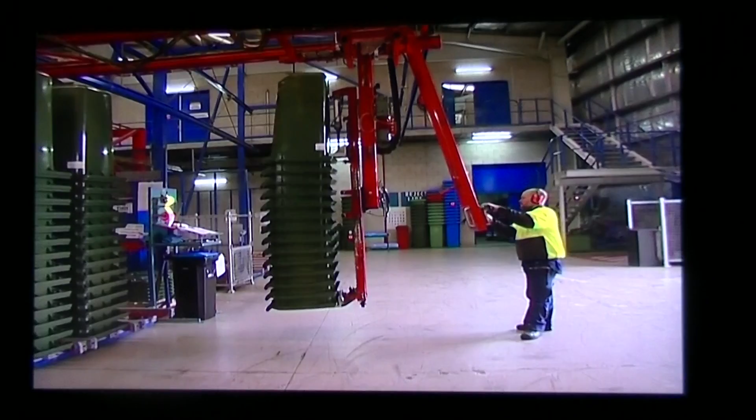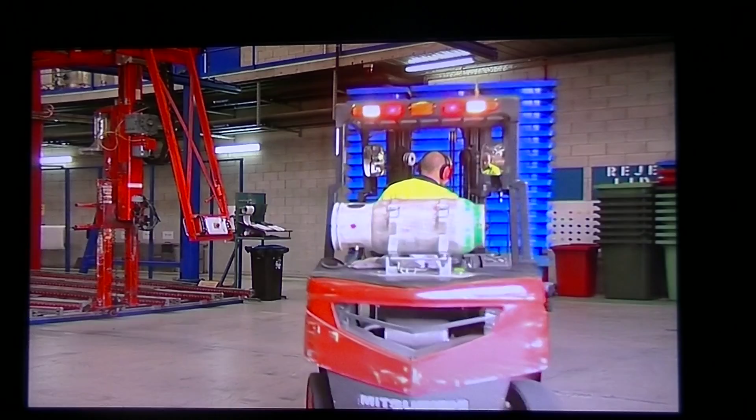We ensure that our MGBs are safe, user-friendly and built to last, which is why our bins come with a stamp of approval in the form of either a DIN EN 840 certificate or a RAL quality mark. Waste containers that carry the RAL quality mark are guaranteed to provide maximum usability, working safety, environmental protection and compliance

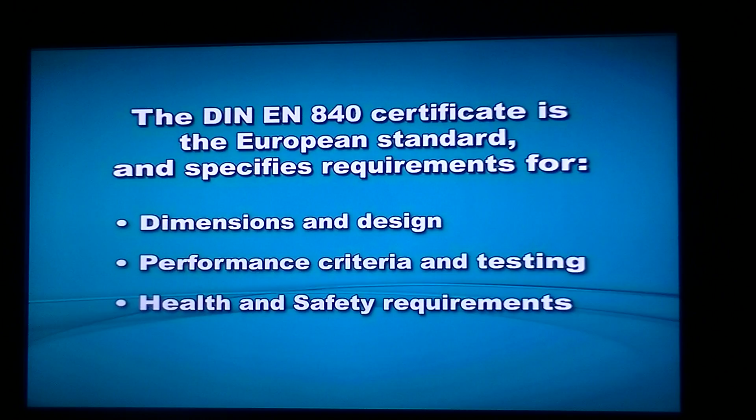with applicable standards. That includes the DIN EN 840 certificate, which is the European standard for the manufacture of mobile waste containers, and specifies requirements for the dimensions and design, the performance criteria and testing, and the health and safety requirements of the MGB.

In order to obtain this certification, Sulo was required to send MGBs made in the Australian manufacturing plant to an authorised testing facility in Europe, where the bins are put through a series of tests, and where the survival rate of these tests is exceptionally low. Sulo emerged as the only Australian manufacturer of MGBs certified to carry the DIN EN 840 certificate.

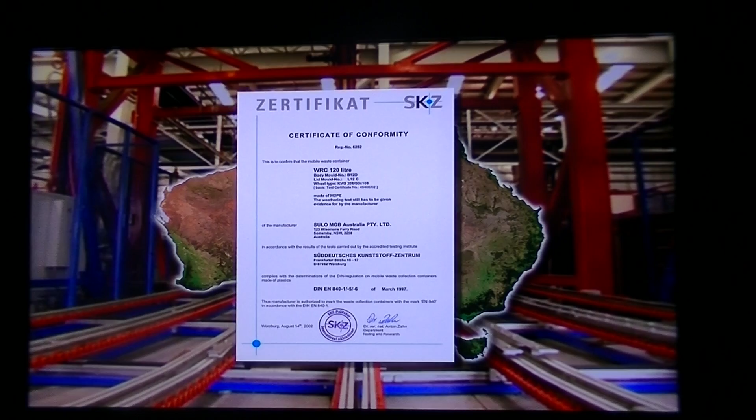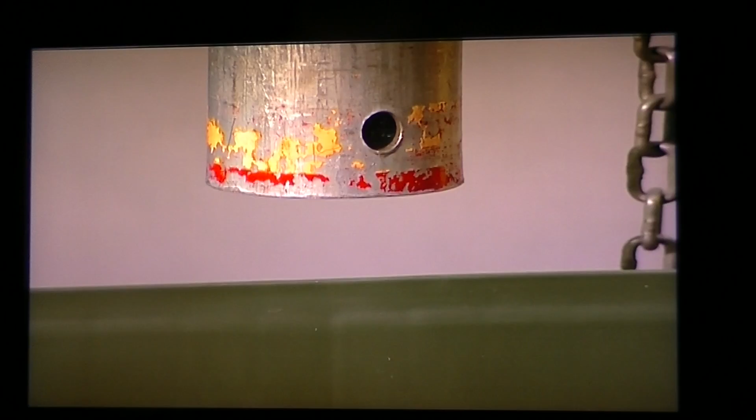Having set a quality benchmark in Australian waste management, Sulo have gone one better by approaching Standards Australia to establish a national standard for the manufacture and use of MGBs in Australia. The standard is being developed by a committee of relevant stakeholders who provide the waste industry with consistent guidelines for

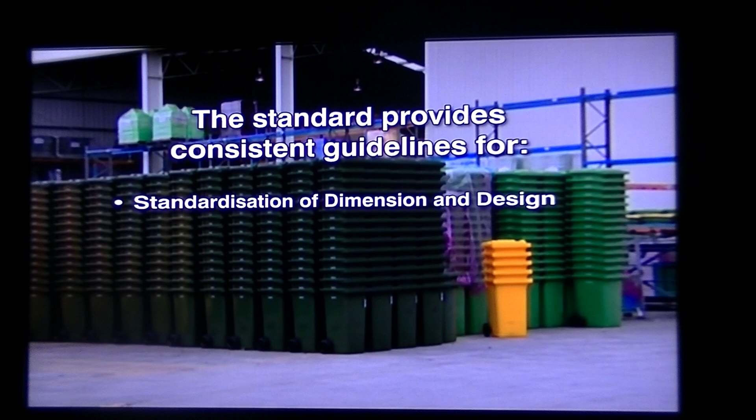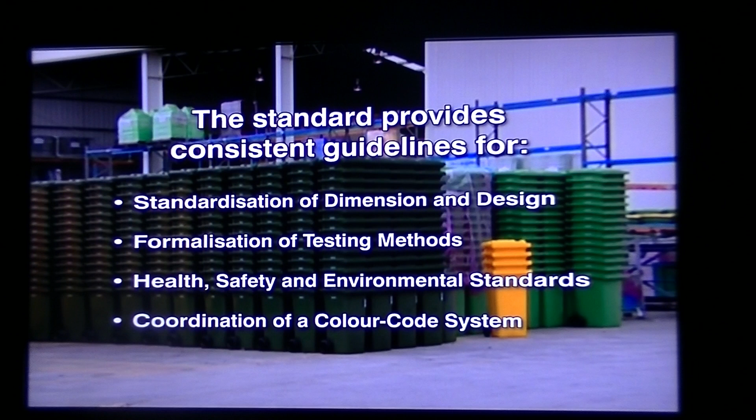standardisation of dimension and design of all MGBs up to 1,700 litres, formalisation of testing methods for waste containers sold in Australia, health, safety and environmental standards for waste bins, and coordination of colour code systems to distinguish the use of particular waste containers. So let's have a look at what makes Sulo MGBs superior.

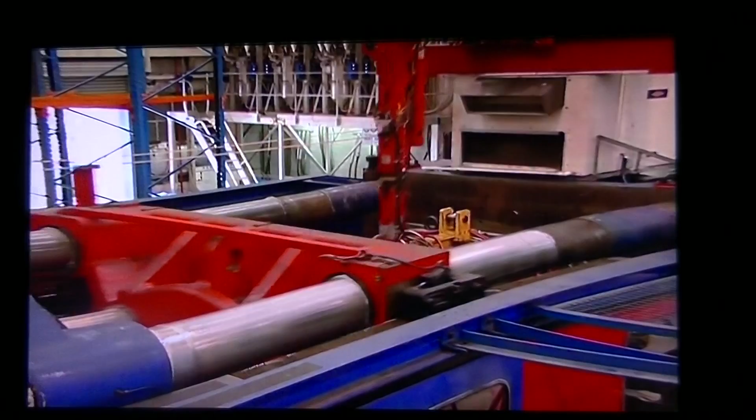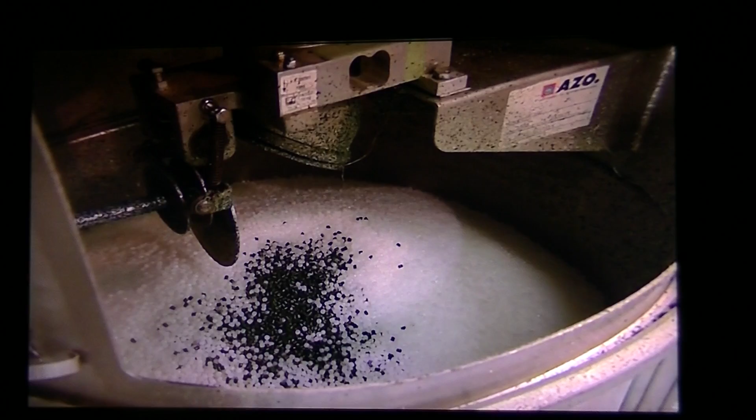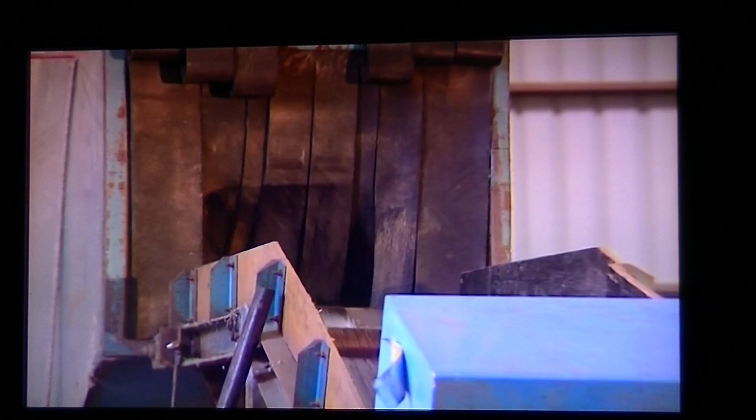Sulo is one of the many companies known as polymer processors. Polymer processors are manufacturers that take raw materials called high-density polyethylene, or HDPE, and convert them into a range of waste containers for the consumer. Sulo processes both virgin raw materials and recycled plastic materials, including milk bottles and old MGBs that have been collected from the community. But how do we get from the raw HDPE to a complete MGB?

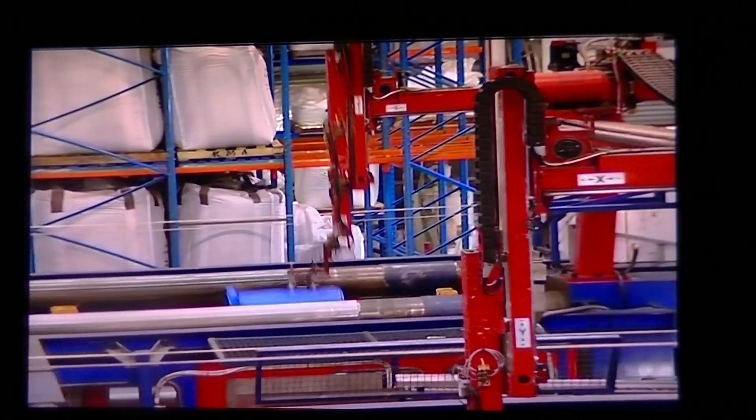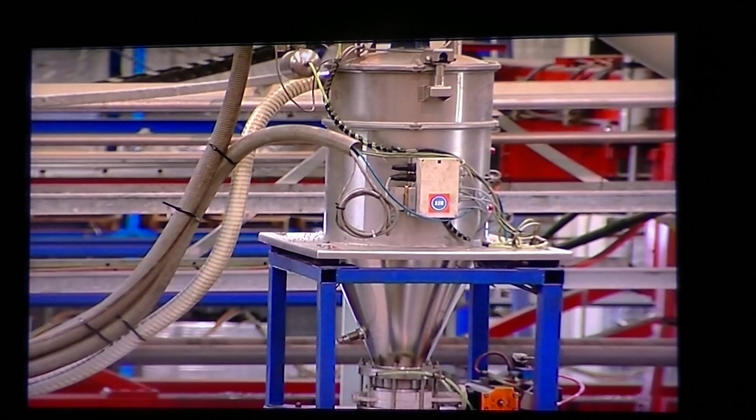The machinery used to convert the raw material into a completed MGB is called an injection moulding machine, a complex device using hydraulic operating systems to drive the various parts. It consists of two main operating systems, the mould clamping system and the plastic HDPE injection system. The clamping system uses hydraulic cylinders that supply enough force to keep the mould closed together, so when the plastic is injected, it is contained within the mould.

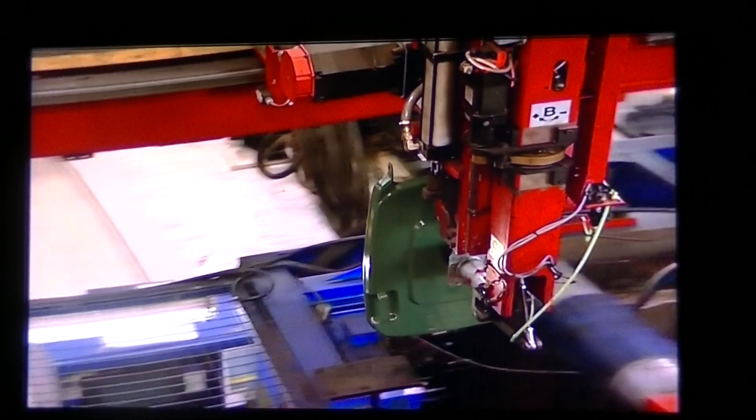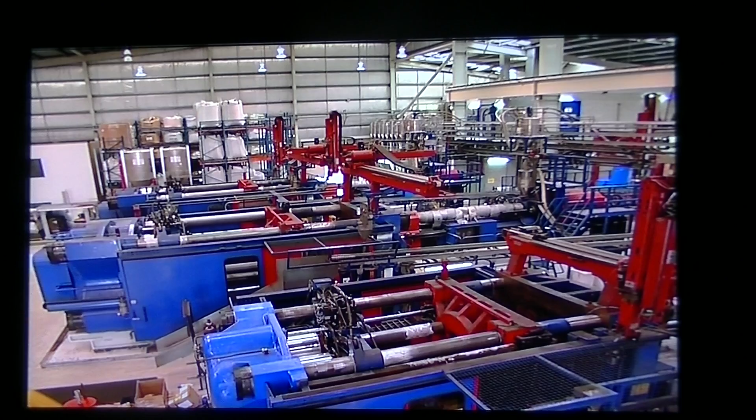The injection system is vital to producing a consistent MGB of correct specifications. It consists of a large steel cylinder that is surrounded by electrical heaters. Inside the cylinder is a device similar to a large screw. The raw material is placed in the barrel and heated to approximately 270 degrees Celsius to melt. Once melted, the plastic is transferred along the barrel by the screw.

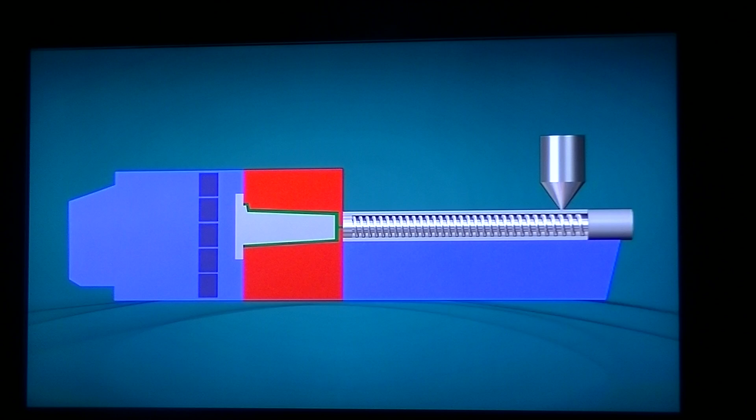The plastic is then injected into the mould using hydraulic pressures. This process is carefully controlled to ensure the mould is completely filled with plastic. The plastic is then allowed to cool, assisted by the flow of cold water around the mould, and is then removed. Now we have a near completed MGB.

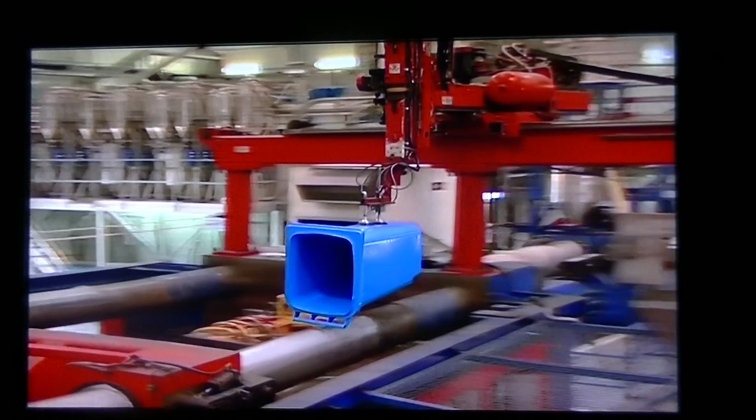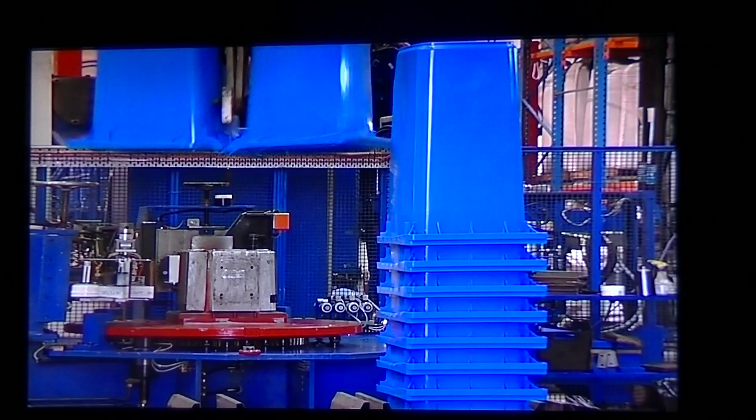During the manufacturing process, we also have the ability to customise each individual order. Not only can we allocate a unique serial number to each bin, but we can also supply our customer's name and logo through a process called hot stamping.

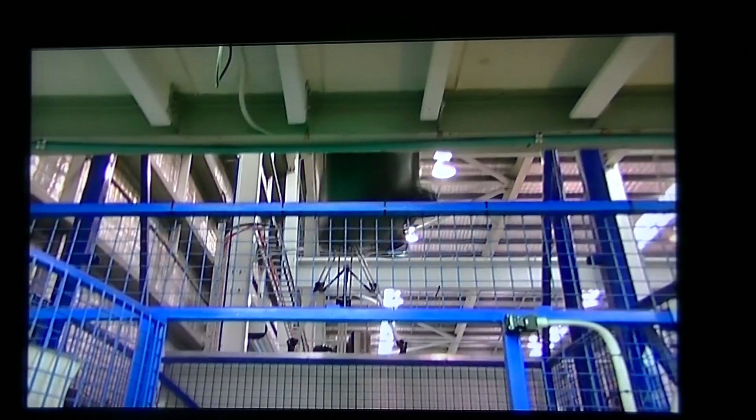We also endeavour to keep up with new technology developments as they occur. For instance, the insertion of radio frequency identification tags, enabling our customers to identify each bin and its exact location. Let's have a look at some of the paces our bins are put through to make the grade.

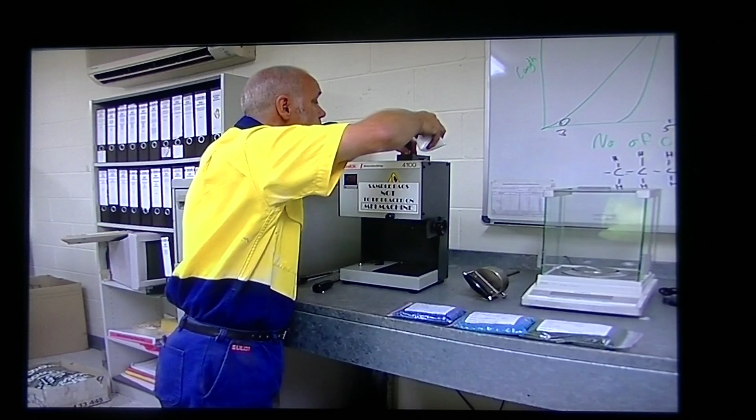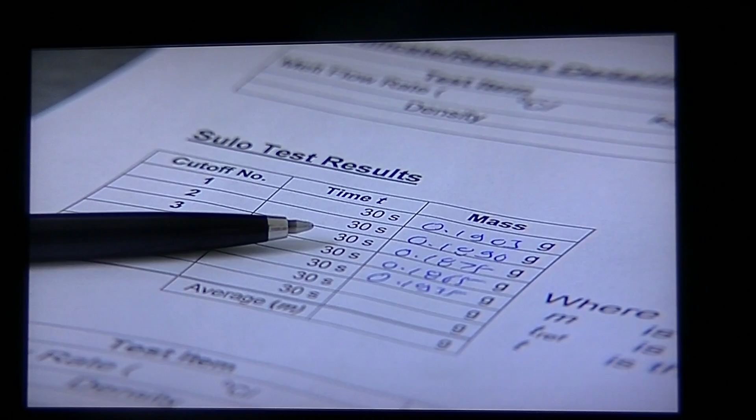To begin with, each new batch of virgin raw material that is delivered to Sulo is visually inspected and then put through an extrusion test to ensure the material supplied exactly matches the required specifications. The test data and sample material are then filed in the Sulo Quality Assurance Log to ensure long-term consistency and traceability of all our products.

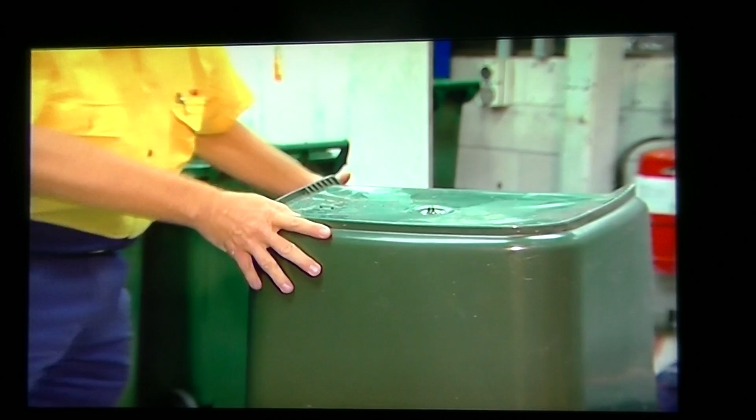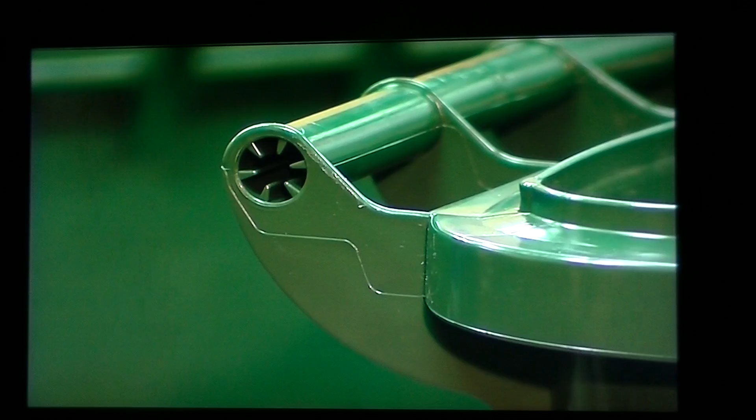Both before and after the sequence of performance tests, a visual inspection is carried out on all MGBs. This is to ensure the MGB has no damage or visual defect, such as cracks, bubbles, large flashes, sharp edges, or any surface defects. This phase of testing also ensures the manufacturing characteristics of the MGB, such as wall thickness, axle diameter, handle diameter, weight and volume, are equal to or better than those specified in the standard.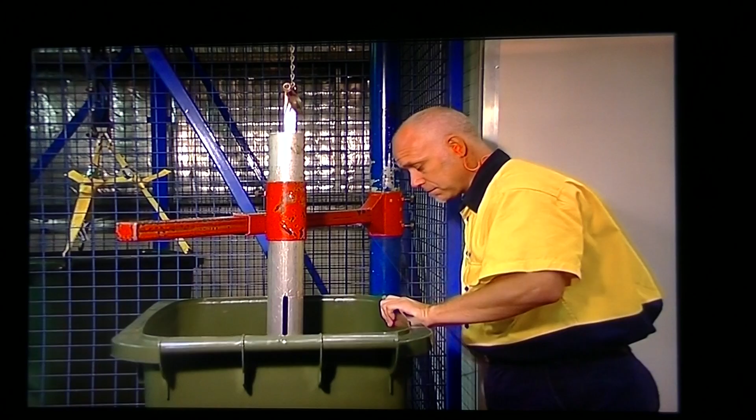In this test, an MGB is placed on a steel plate, with the distance between the base of the MGB and the ground being 50 millimeters, ensuring the base can spring freely. A 5 kilogram cylinder is then dropped from heights of 0.8 of a metre on the body, rim and lid, and 1 metre on the base, impacting with sensitive points of the MGB such as the injection point, the handles, and the junction between the body and the lid.

This test is also conducted with an MGB that has been cooled to minus 20 degrees Celsius for a minimum of 12 hours to simulate the very harsh working conditions. The purpose of this test is to assess the ability of the sensitive points on the MGB to resist impact and therefore perform above and beyond the requirements of the standard and the expectations of our customers.

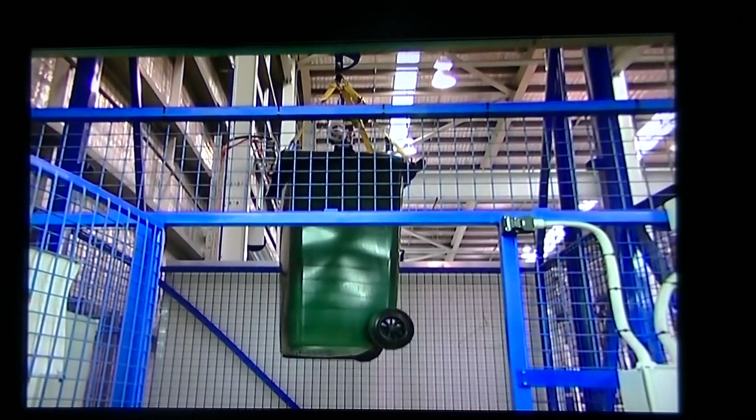The drop test is carried out to ensure the integrity of the container after being dropped from a height beyond anything that normally happens in the field. In this test, 2 samples are filled with a load equal to 40% of their total capacity. For example, a 240-litre MGB is filled with 96 kilograms. Each sample is then dropped 4 times from a height of 3 metres. For the first 3 tests, the containers must land level.

On the 4th attempt, the container must hit the bottom front edge. This angle is achieved by lifting the container by the back rim only. After each drop, a visual inspection is carried out to check for any damage to the container. In order to pass this test, and unlike inferior products, the Sulo MGB must maintain its functionality and not split or crack at any time during the process of the 4 drops. This test is also conducted with an MGB that has been cooled to minus 20 degrees Celsius for a minimum of 12 hours to simulate the more extreme conditions.

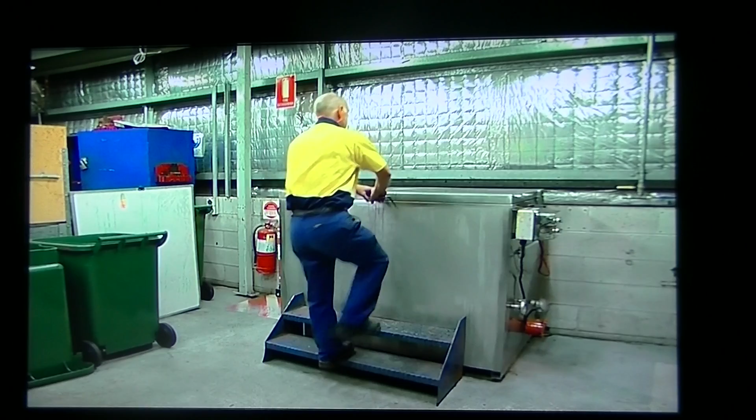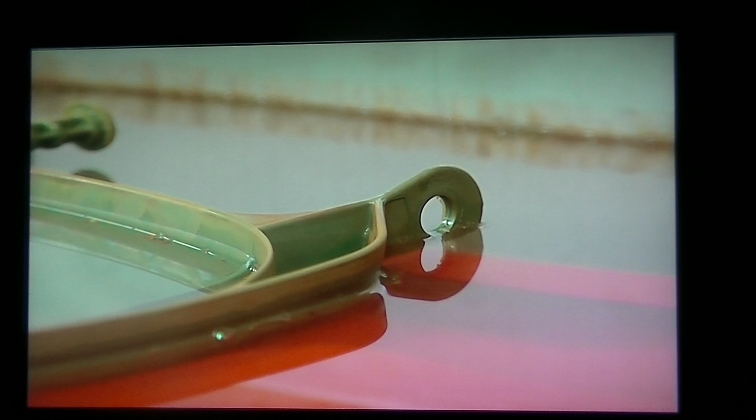To ensure the longevity of our products, we also conduct a stress test, whereby a tank large enough to contain a complete MGB is filled with a solution of detergent and water and heated to a temperature of 70 degrees Celsius. Once heated, the Sulo MGB is then placed in the tank for a period of 48 hours, simulating years of aging. After removal from the bath and rinsing, the appearance is then evaluated with normal vision from 1 metre in bright daylight.

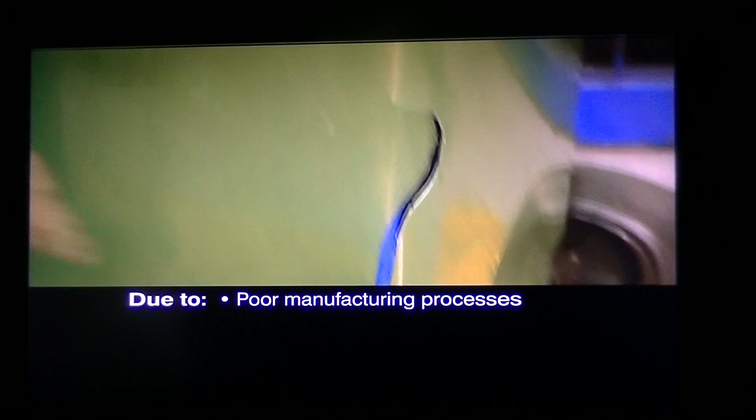This test is carried out to determine the level of internal stress moulded into the plastic, which may not become apparent for several years, but could potentially cause future failures. Unlike Sulo products, this is what happens to an inferior product. It cracks severely after testing and clearly indicates the use of inadequate materials or poor manufacturing processes. So there you have it, some of our major internal testing to ensure that Sulo continually manufactures a certified quality product year in, year out.

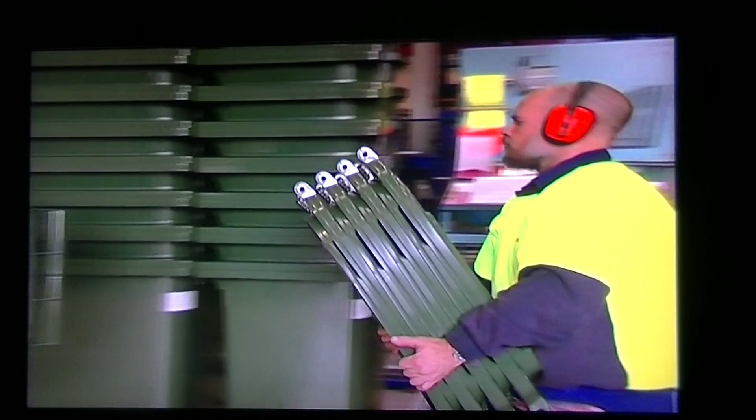To finish up with, here are a few comments from our customers confirming how well Sulo MGBs perform in the real world. Glenorchy City, where ideas happen. The bins are of a very high standard, the hot stamping was excellent, and we are very satisfied with Sulo's performance. The information supplied by Sulo throughout the course of the manufacturing to keep our staff informed of progress and delivery details was of an exceptionally high standard. I would have no hesitation in recommending Sulo to future clients.

Moreland City Council. I would like to thank Sulo for the professional manner in which you completed the project of supplying and distributing 30,000 mobile recycling bins in the southern half of Moreland. Your ability and willingness to amend production schedules to cater for the delays created while various approvals were obtained was truly appreciated. Similarly, the completion of the bin rollout within the nominated timelines was another part of the successful achievement of this project.

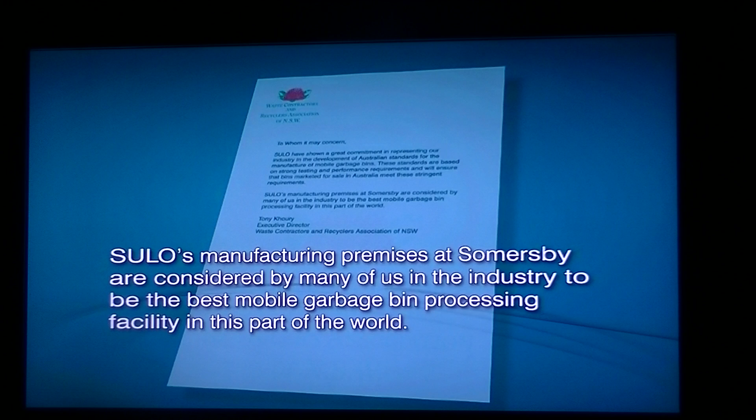Waste Contractors and Recyclers Association of New South Wales. Sulo have shown a great commitment in representing our industry in the development of Australian standards for the manufacture of mobile garbage bins. These standards are based on strong testing and performance requirements and will ensure that bins marketed for sale in Australia meet these stringent requirements. Sulo's manufacturing premises at Somersby are considered by many of us in the industry to be the best mobile garbage bin processing facility in this part of the world.

There you have it, Sulo MGB Australia, producing a range of mobile garbage bins that are manufactured and tested to give a service life second to none.